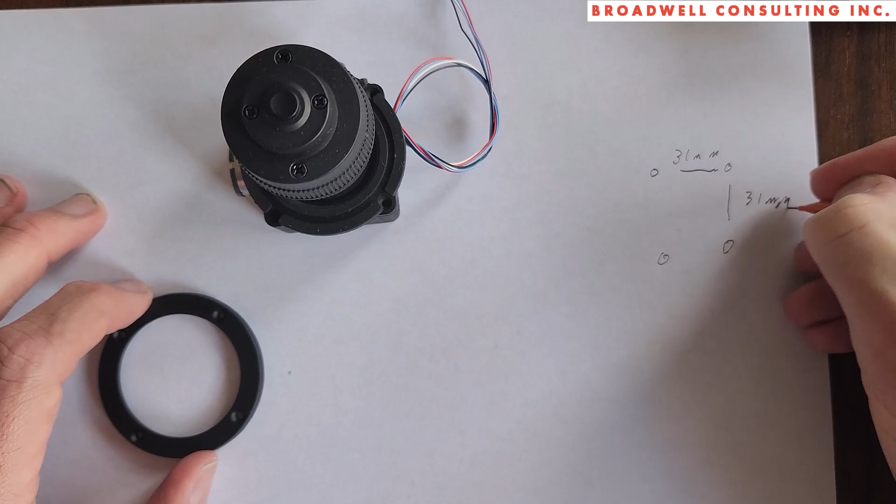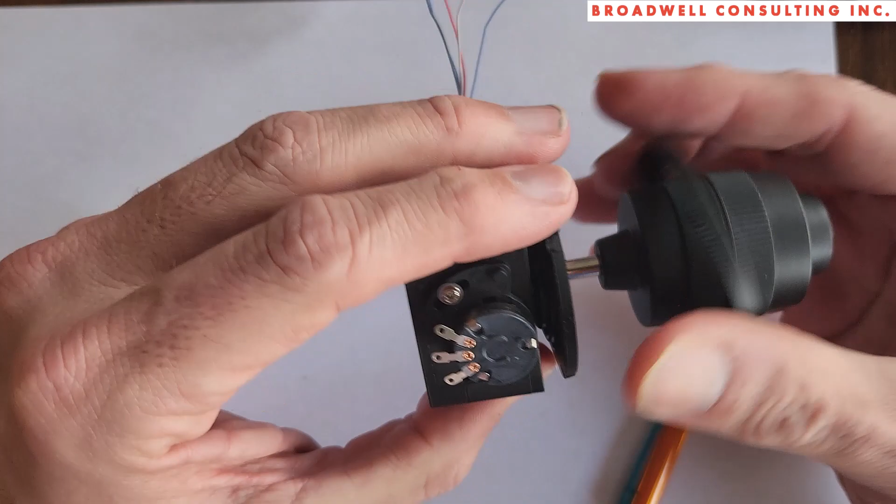And then we've got this rubber seal here that goes there, and that fits just inside of the back of this plastic thing. I think we're supposed to push this through and have this sit on top of the wood. And so we really don't need a very big hole for that joystick whatsoever.

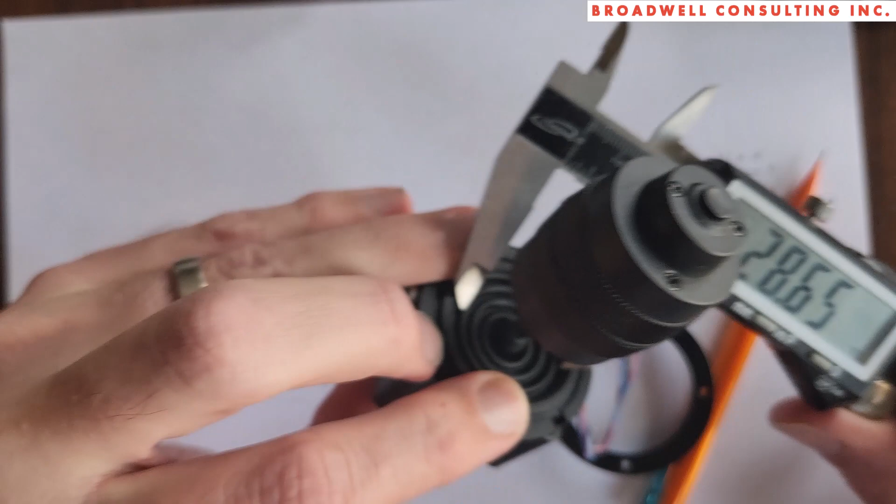If I look on the inside here, there is another circle here that allows the joystick to move. We're going to want to go over a little farther than that. So it looks like the joystick, we'll look at that kind of third circle in and just approximate that. So it looks like I want a 27 millimeter diameter hole in the middle.

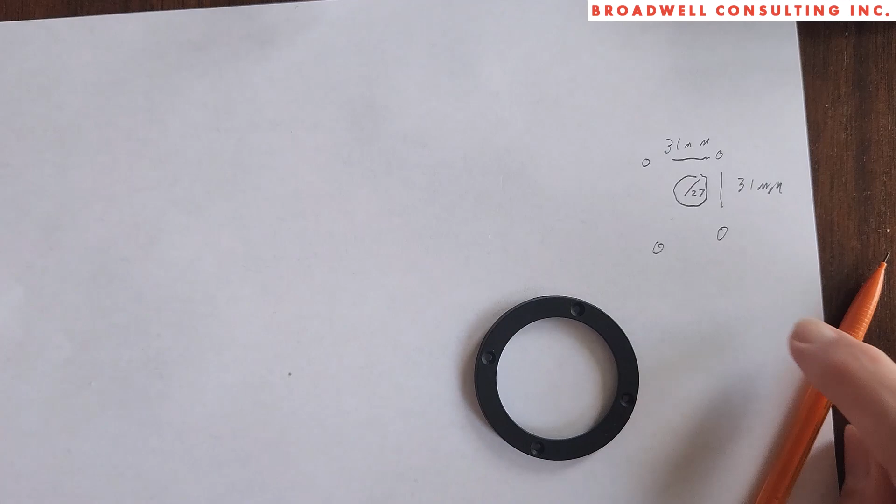Then the joystick is going to sit inside of there. And so how much height do we need? There's nothing on the bottom that looks interesting, so we can put it almost straight down to the bottom. And it looks like it's 30 millimeters high.

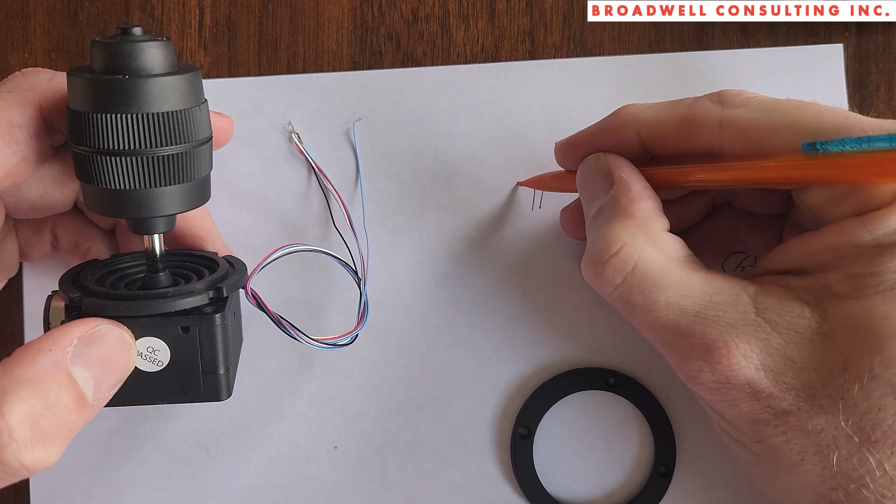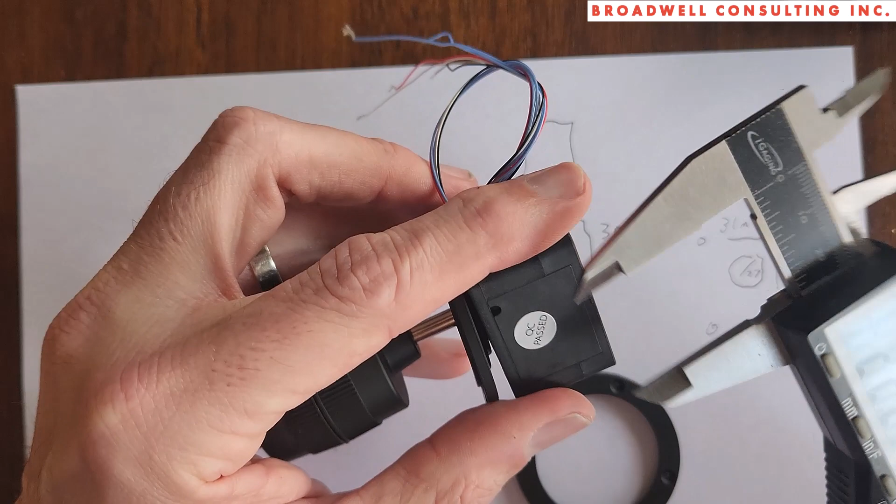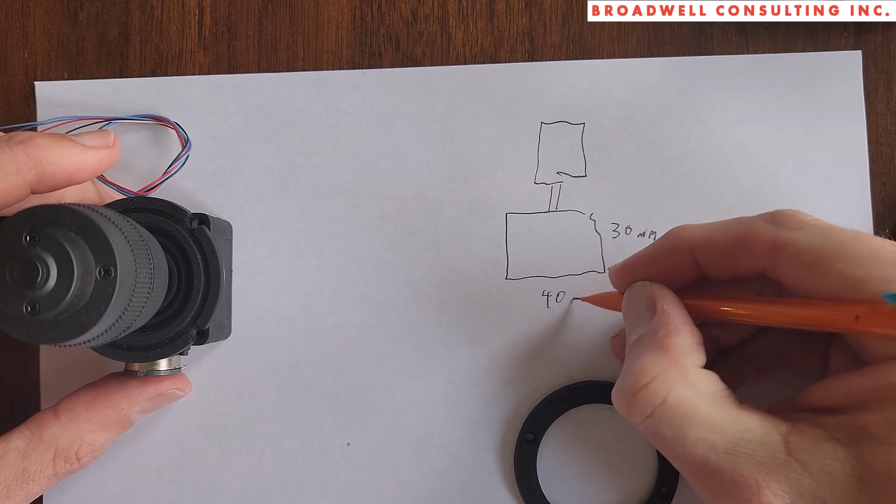And 40 millimeters square at the bottom. So I have 2 of these, so we'll want to make 2 sets of holes that are similar to that.

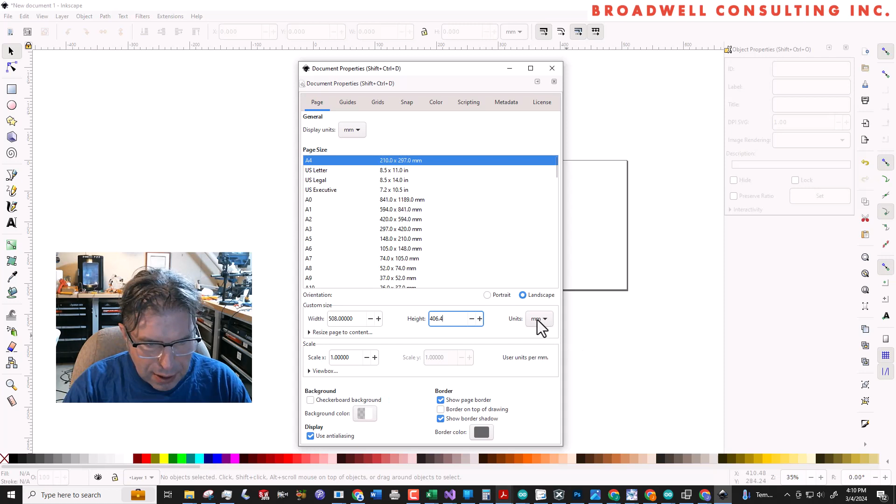So now we've got a bigger square in which we're going to do this. So let's create a circle that will be our main center hole. I'm going to hold down the control button. That gives me a perfect circle, and it doesn't really matter how big it is.

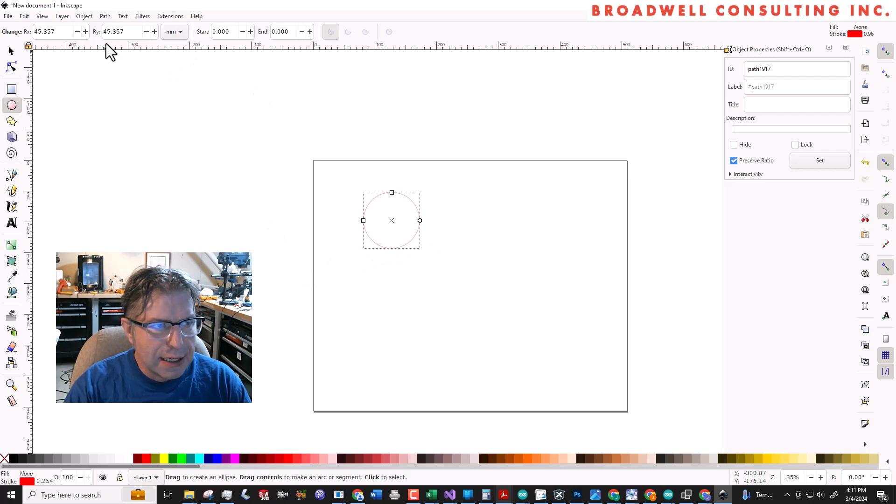Now I'm going to go over here. I'm going to unselect it and reselect it. I found I've had better results there. I'm going to make sure that this lock is set because I want the lock to keep the length and width the same. And we said we want our interior hole to be 27 millimeters.

So 27 millimeters across. And then we want 4 little holes. Again, holding down the control key. And we didn't say how far those were. I saw the screws that go through them. They're quite small. So let's set these for 2 millimeters each.

And that's the laser's just going to hit that and make a small hole. And we want 2 of those.

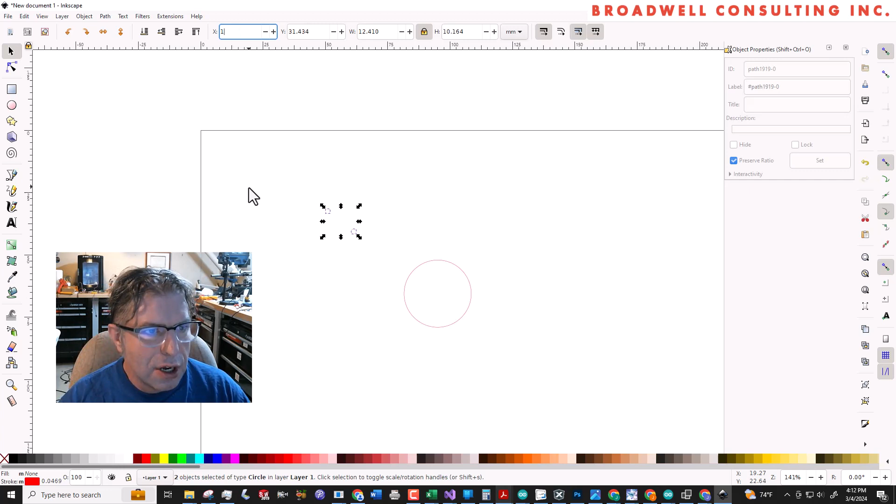I'm going to set dimensions. I know I want them 31 millimeters apart, that's how big our holes were. So I'm going to set the X to 1 on this one, and the X on this one to 32. And actually, I'll do that with the Y's as well.

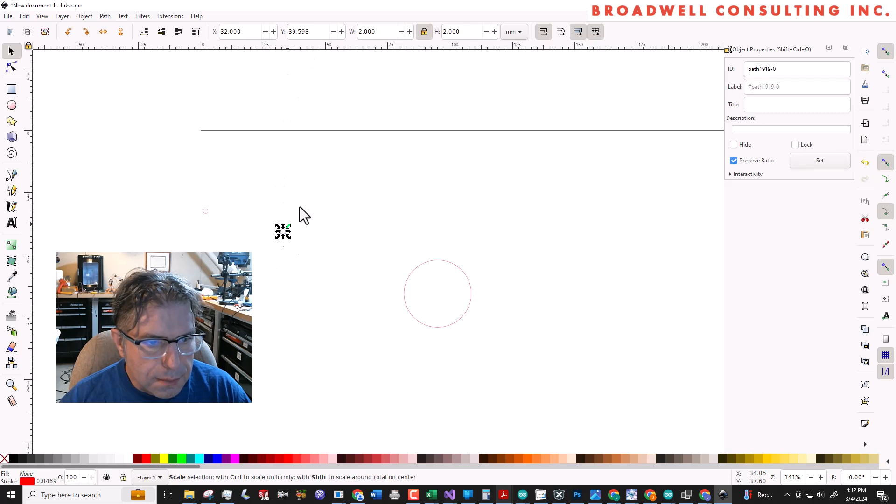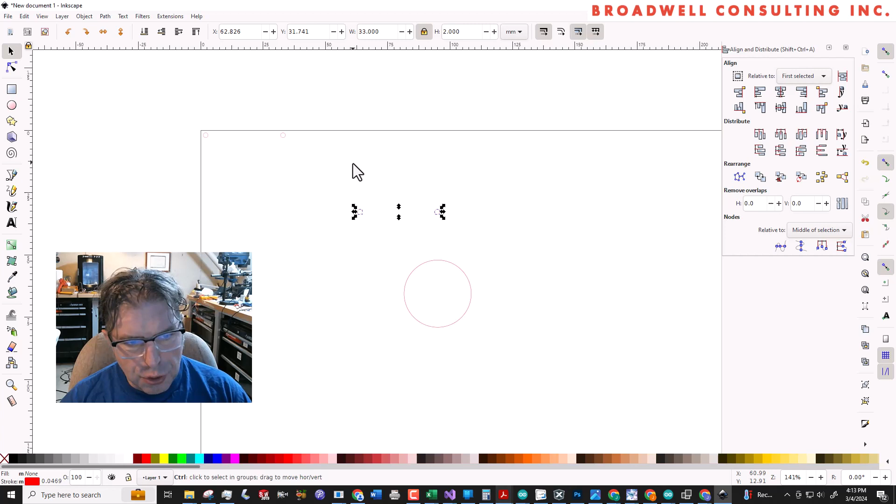Okay, so now I've got 2 circles that are 31 apart. I'm going to cut and paste those. I'm going to come up here and go to the alignment, and I'm going to hit Control G to group those 2.

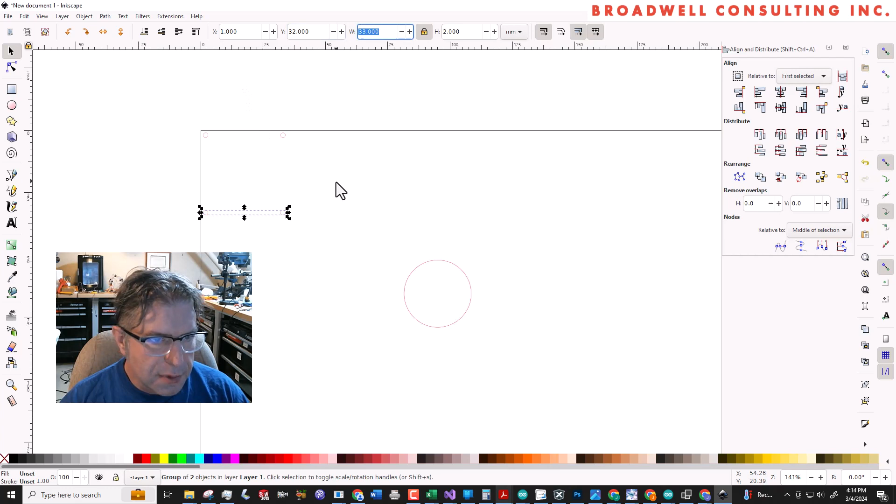And now I'm going to say align them both left. And I set this group at height at Y of 1. I want them 31 millimeters apart, so I'm going to set this one at Y of 32. And that looks good. Now I'm going to take all 4 of those and group them.

Now I want to put my circle in the center of those, so I'm going to say align center and center. And now I'm going to hit group on that. And there we go, that should be the circle that I want.

So before we go any further, let's take this and cut it out on some cardboard and make sure that we like the way it looks.

So I'm going to go to create a new design, upload a file. And I'll upload the beginning of my joystick box.

And actually, let's go back and let's put a little box around this guy so that we get another cut, because I don't want to have to deal with that whole thing when I'm just testing. So I'm going to create a box in a different color, because that's not what I wanted. To get a different color thing, hold down Shift and then do it.

So for right now, let's draw another box around this. I want no fill, and I want it to be blue, which it is. And we will make that guy 40 by 40.

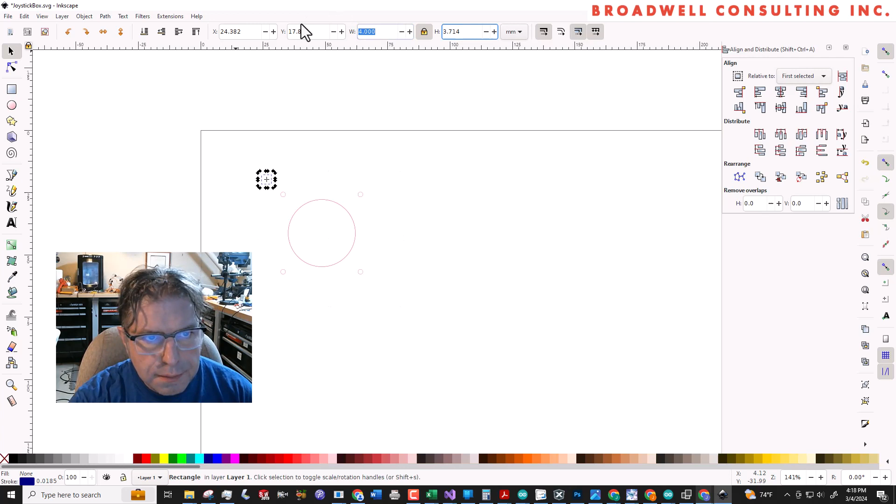And again, this is grouped already, so we'll take and we'll center it on that. And I made this blue and the others red. I wanted to cut the red ones first, then the blue. You want to work from inside to outside.

So now, let's go into the Glowforge software. And forget that, let's upload my file.

And that's good, and you can see now I'm using an unknown material. I'm going to set it to medium draft board, that's what I use for this heavy duty craft board that I'm using.

And you can see it separated it into two separate cuts. One is the outside cut that was in blue, the other is the inside cut that was in red. These are in the wrong order for me, so I'm going to drag this one up above that one. Now it will cut the inside part first and then the outside part. It runs the steps from top to bottom.

So let's, we're looking at the Glowforge. Let's put some paper in it and let's cut it. Okay, I loaded my paper. Let's drag this up to the corner so we use as little of our materials as possible, and we'll hit print. And this will be a fast one.

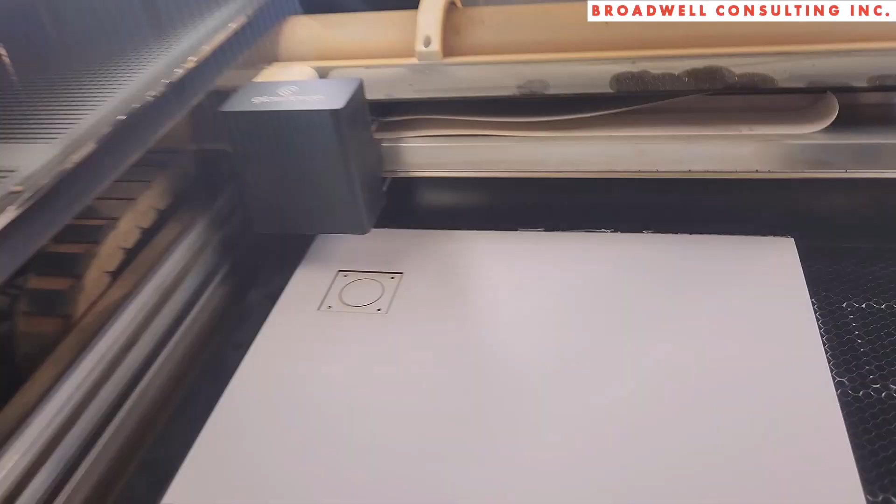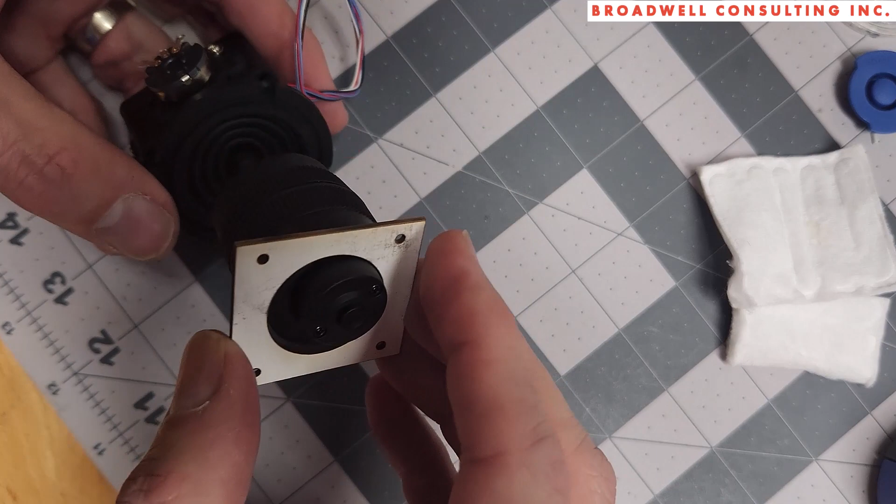All right, and let's check out the fit here. That's interesting, this doesn't go through there. That's not something I anticipated.

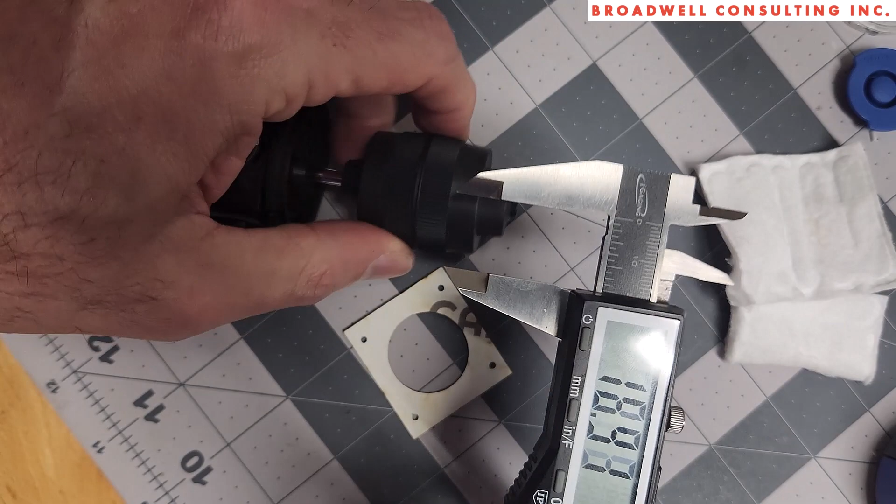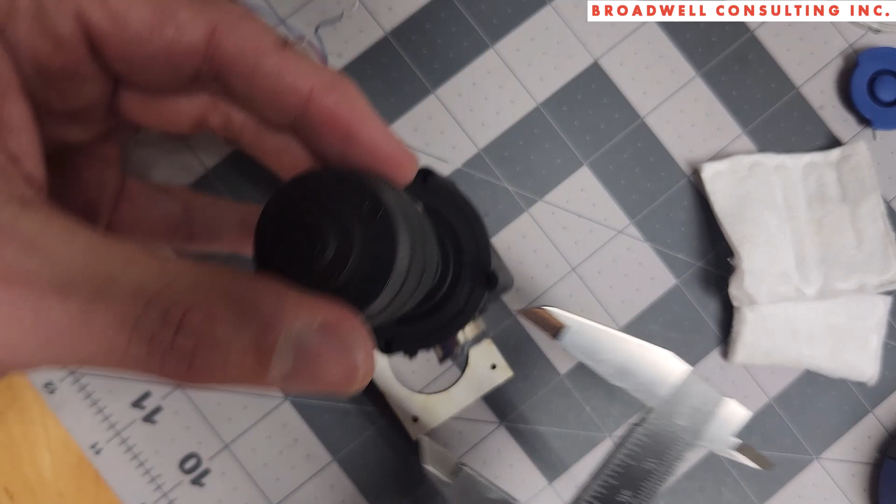So now we're going to bust out the calipers again and figure out what size hole do we need to be able to pass the joystick through there. And it looks like 36 millimeters should get the job done, and that's still a little smaller. Actually, not a coincidence, this inner ring in here, it looks to be the same size as the joystick.

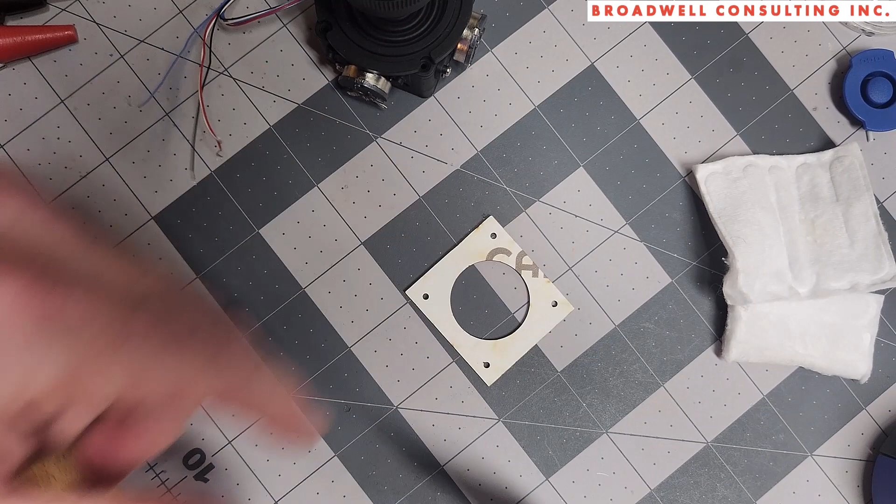So let's take this guy, let's make that hole bigger up to 36 millimeters and cut it again.

Okay, going back to Inkscape, we're going to take this guy, we're going to click on it once, that gets the group. I'm going to click on it again. And if I keep clicking, eventually I get that inside circle.

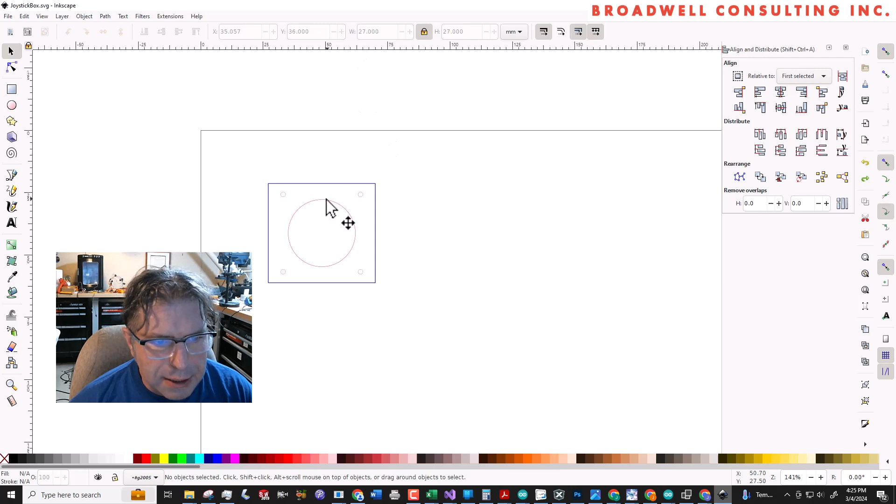And so we said we need the diameter on that one to be 36. And that screws up the whole— I'm sorry, that was not right, that was the Y. We want the width to be 36. And it measures it from the edge, so that screwed up this whole group.

So we're going to ungroup this. We're going to get rid of this guy for a minute. The 4 circles are still grouped, so I'm going to hit Control U to ungroup.

And I lost my grouping on those circles. So now I'm going to hit Control-G to regroup those. Hit this guy and do the alignment on the centers. And so now I'm going to regroup these and I will align it again within the center of that box.

And say save. Go back into Inkscape, or go back into Glowforge, delete this guy, upload the file again. And let's adjust the paper. And let's cut it.

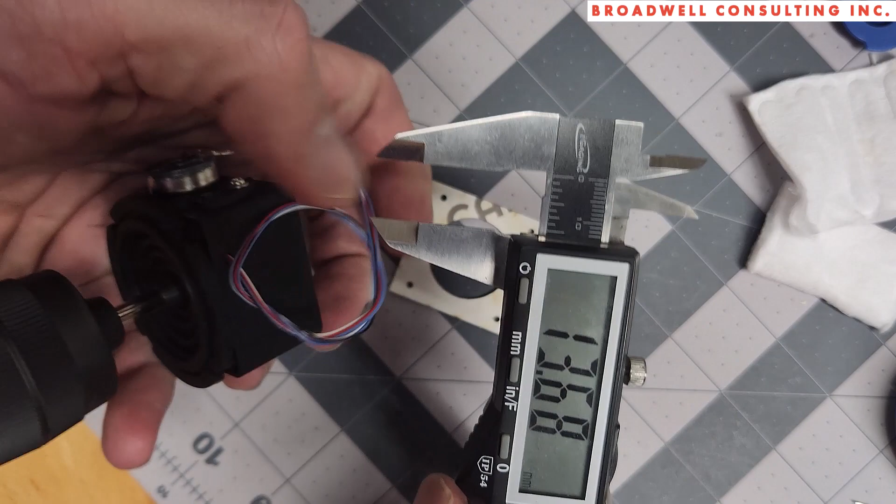I'm going to measure the diameter of that rubber seal. And it's hard because when I squeeze on it, it gets smaller. That looks like about 39.3 millimeters. So we'll make it, we know we're going to have a little bit of kerf. If you don't know what kerf is, look that up. We'll call it 39.1.

And I spoke wrong. To ungroup is Control-Shift-G. That's why I was having problems before.

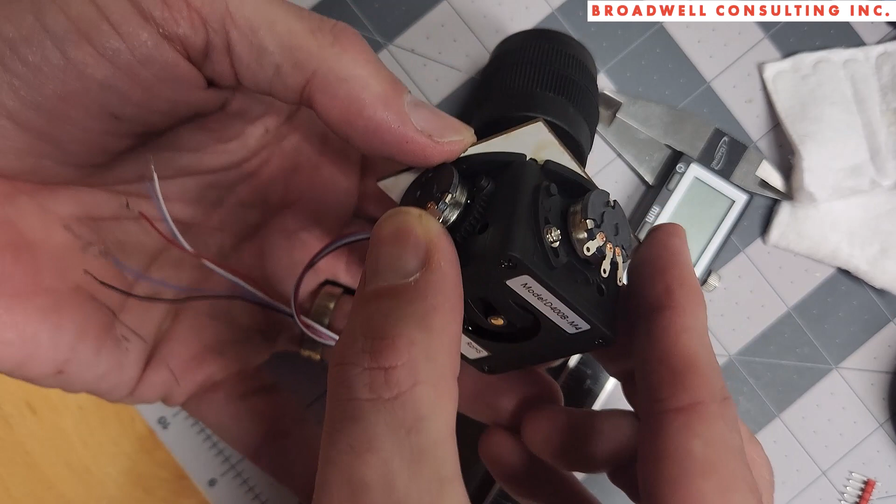looking from the bottom, that looks about right. So I'm going to get the screws real quick and put them through the holes and just verify that that's right.

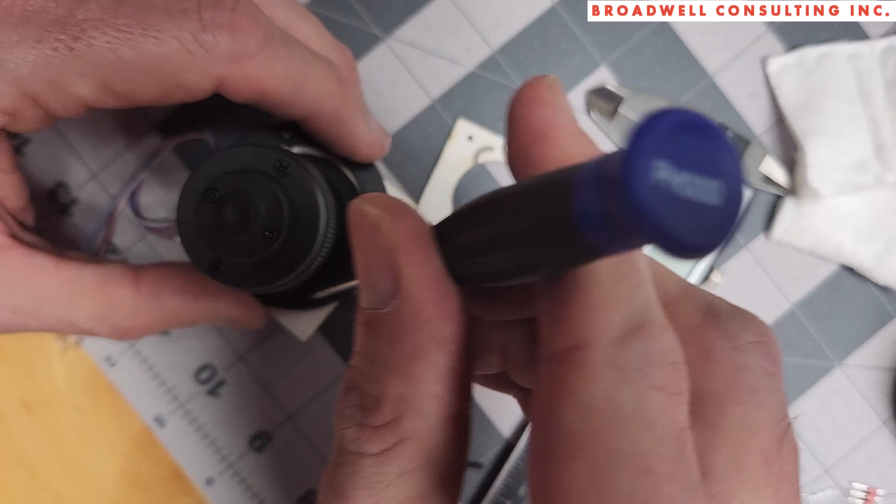Okay, and that is definitely off. These are definitely not big enough. So what I'm going to do is I'm going to set it concentric with the other one. And then I'm going to use a pencil to put a dot down in the middle of that. And that'll show us how far we're off.

So again, I'll use the micrometer here. You can see my little dot. We can see it looks like we need about 2¼ millimeters added to that.

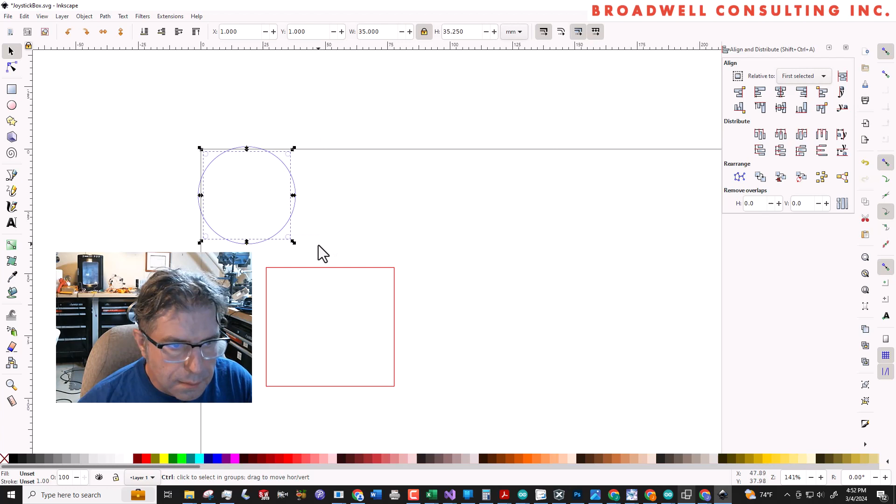Okay, so now we're going to make the box that we're going to put the thing in. And there's no reason for us to reinvent the wheel here. We want just a standard tabbed box. And there's lots of generators out there.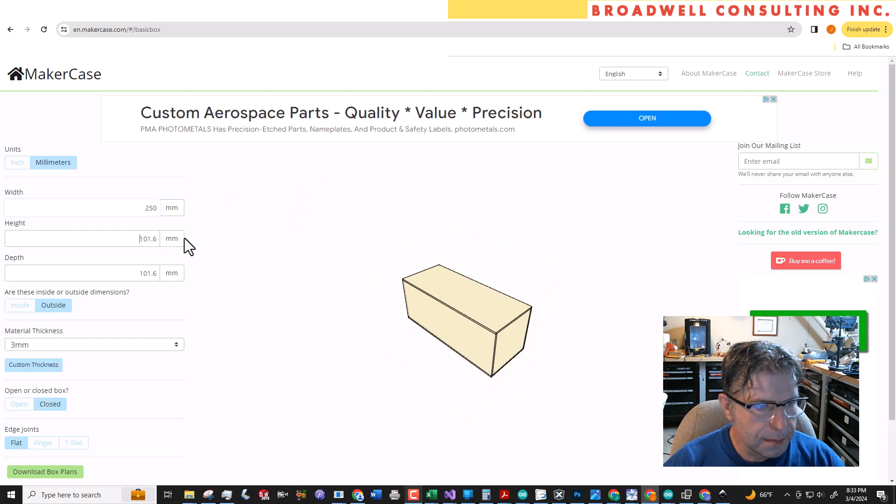250, 150, and depth is 40. So that's what our box is going to look like.

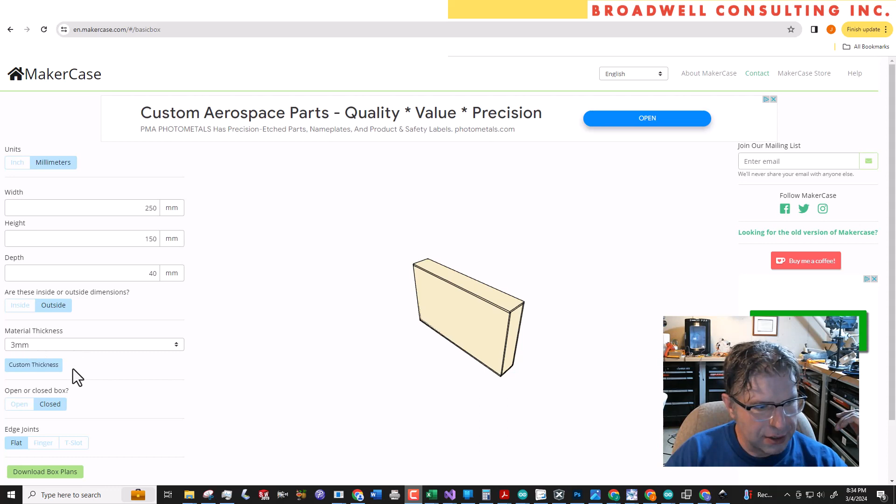We're going to be using 1/8 Baltic birch plywood, which is approximately 3 millimeters. That's good enough. We can adjust for kerf and things like that if we want to, but I'm not going to. We want this to be a closed box because we want a top and the bottom. And so that looks like a good box.

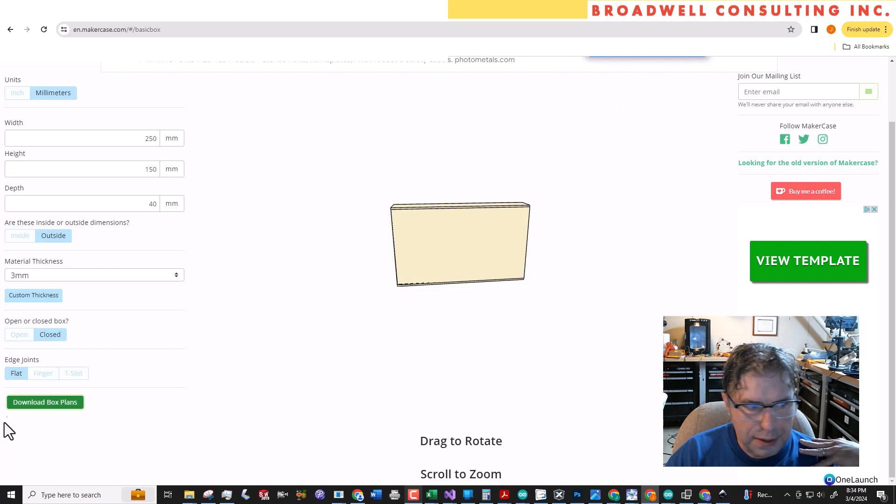And we'll import this into Inkscape and then add our holes to it. I don't like the panel labels. That's just something that I delete off. And so I'm going to do that, and I'm going to say, oh, we don't have the finger joints. Edge joints, finger. Okay, that's what we want, because I want to be able to put it together that way.

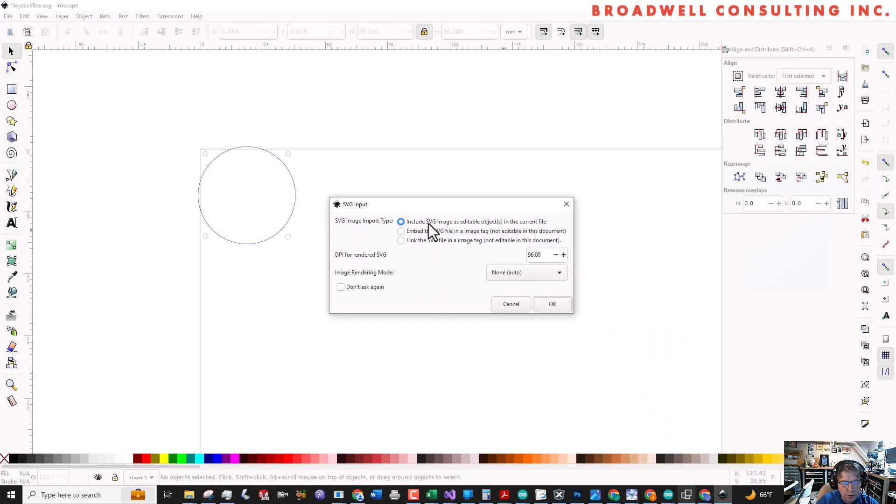Download box plans. Disabled. Download a single file SVG. And there it is. Now let's drag that file that we downloaded into Inkscape. We're just going to drop it on top of the file we've already got open. We're going to say include SVG image as editable objects in the current file.

And zoom out, and we can see we've got those here. And I'm going to take those and make the lines a little thicker so I can see them better. Doesn't really make any difference.

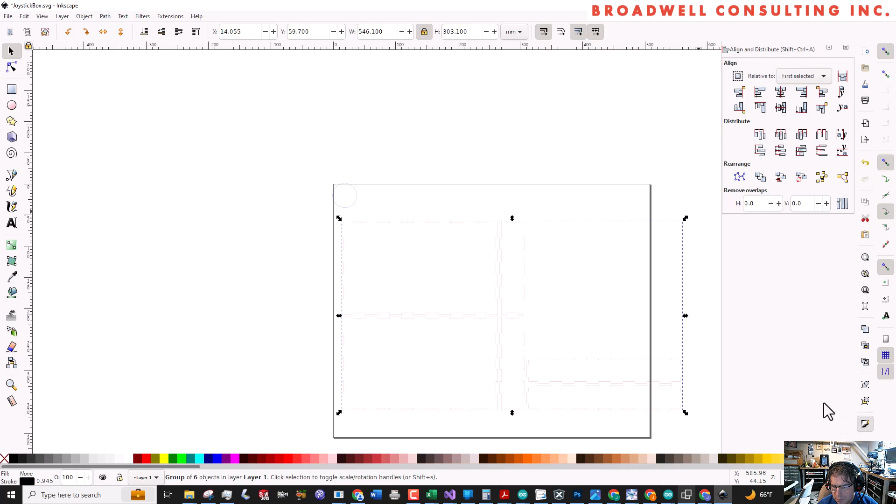That's better, and these are grouped. So I want to be able to move them around on my print bed, so I'm going to go to Object, Ungroup. Now I've got individual items, which is good.

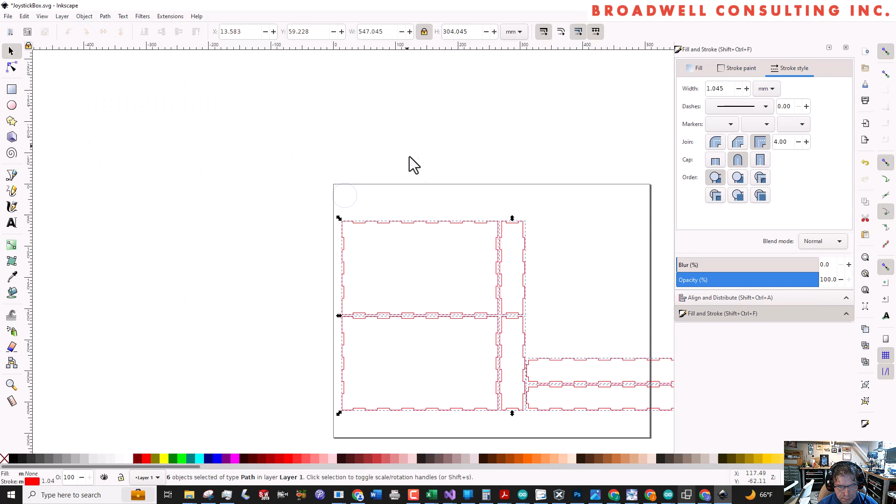So one of these is going to be my top, one of these is going to be my bottom. Let's take two of my holes and align both of those centered from a horizontal, and then let's use the distribute. Yep, can't do that.

How far apart do we want these? We know that this thing is 250 wide, so maybe we'll make it 180 separate. So again, we'll use the trick of declaring this at number 1, which would make this one 181.

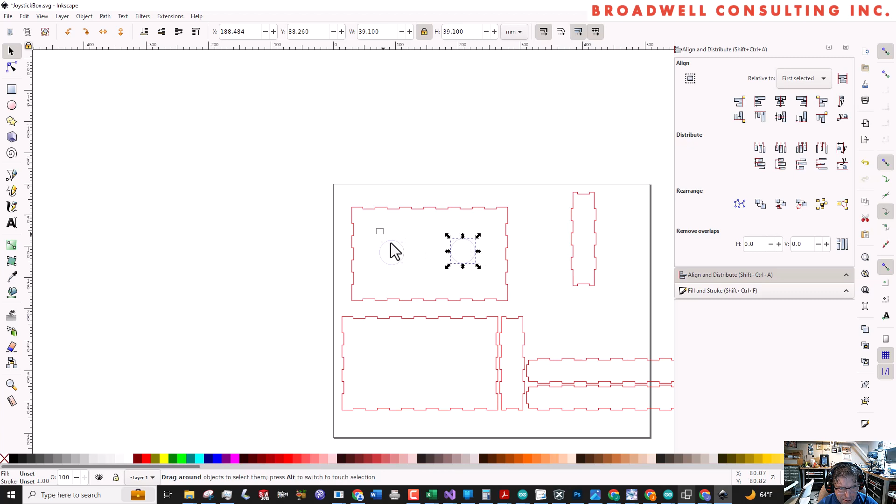And do I like that? No, I think I want them about, I'm just going to eyeball it. I think I want them about that far apart. So again, I'll do that.

And now I'm going to group them, and I will align the group now centered with that. So now I've got two sets of holes. If we get in close, we can see we still got the little holes, and those should cut that way.

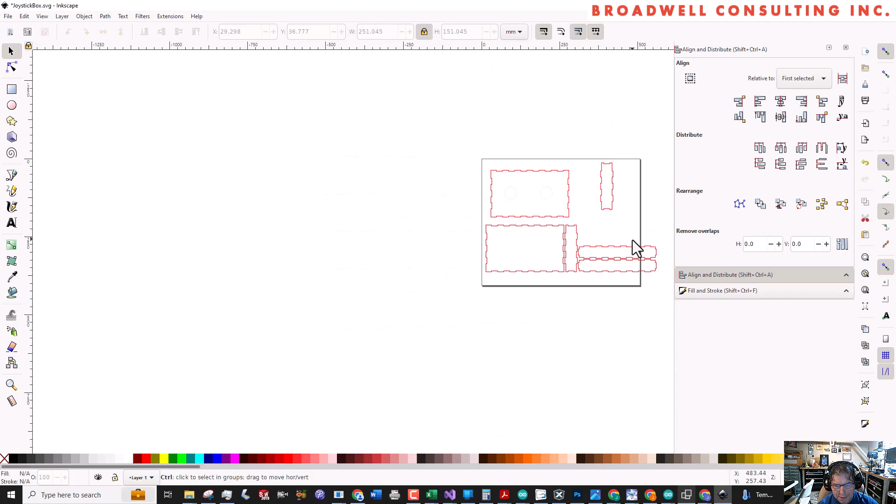Next, I know that I have these long pieces right here, and I know that I'm going to want a place for wires to come out of this thing. So I'm going to create another box, and we want it to be an inside cut.

So again, I'm going to do it in blue. That's not what I wanted. We'll do that, no fill. I'm going to hold down the Shift key and click blue. And so we've got that.

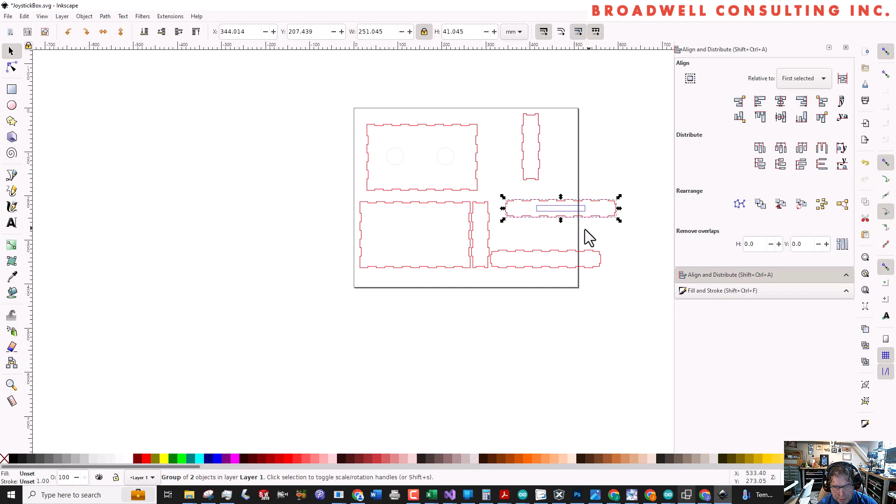And so now how big do I want it within here? Probably smaller than that - that width looks about right. So I'm going to select both of these again, and align it relative to the centers. I want these things to always move together, so I'm going to group those two.

Now, maybe we should add some text. So I'm going to come in here, and this is for a robot controller. And I'm going to take that text and make that Arial.

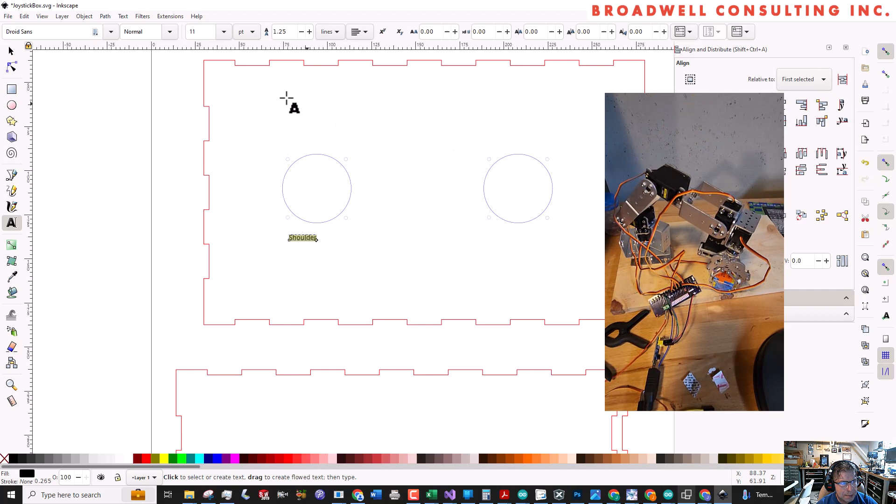Actually, Arial Black is what I like. Is Arial Black available? No, I guess it's not. Okay, and we'll make that

18. And I want to score these, so I'm going to mark them no fill, and I will make my score lines green.

And so then I'm going to duplicate this guy. If you see that I've got these arrows, this lets me make things bigger and smaller. If I click on this again, you'll notice the arrows change to these angular arrows, which let me do this instead. And I'm going to hold down the control key, and that'll make it move at, I don't know, 30-degree angles, 15-degree angles. I don't know what it was doing there, but it's definitely constrained.

So I'm going to take this, and I'm going to make it relative to that here. And it's important when we do alignment for some things - note that this is relative to first selected. So I'm going to select this box first, select shoulder, and do that.

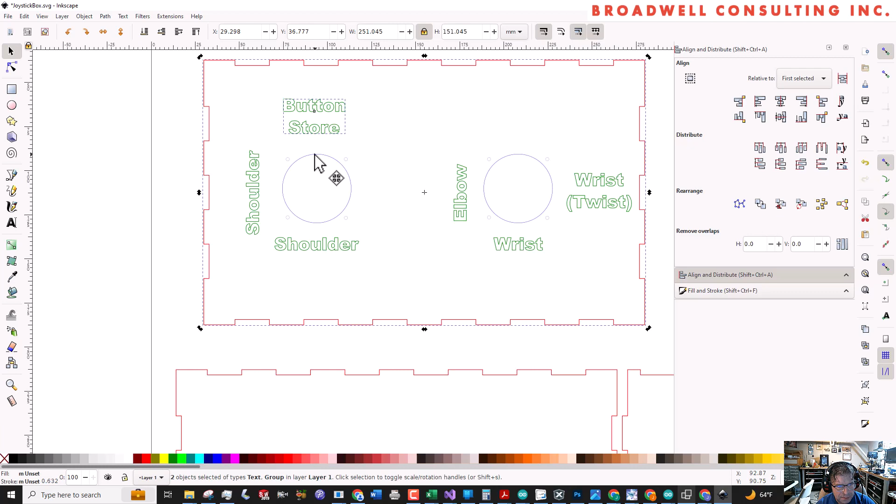Button. We'll store a position in the future action of this thing. So again, I'm going to go through here, click this, until I get to... had it, the object I want.

Make sure that that's centered. And then, for the other one, we have a gripper on that robot. And I think I want these two, make sure they're aligned with each other, and then I want them down a little lower. Okay, so these will be my...

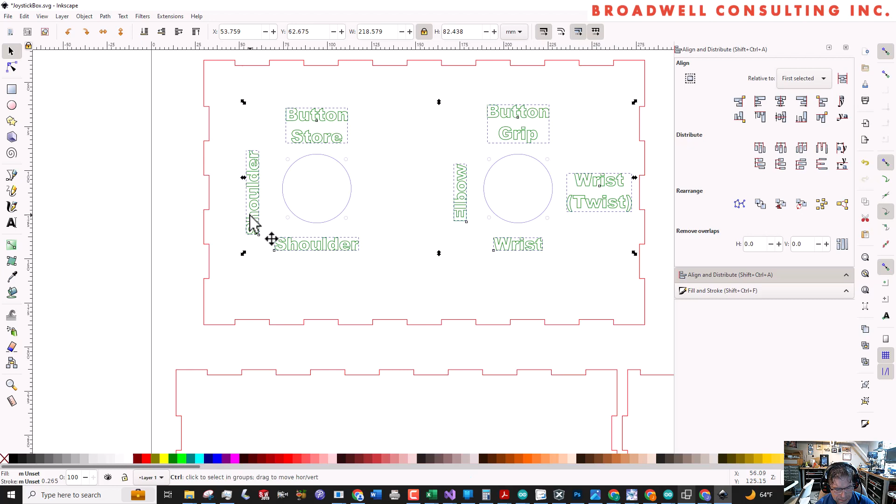in my scoring, and let's go through and mark all these and group them, and then let's add them to a group with the main thing. So now all these, since I put them all in a group, that whole thing moves around, and I can position it on the table that way.

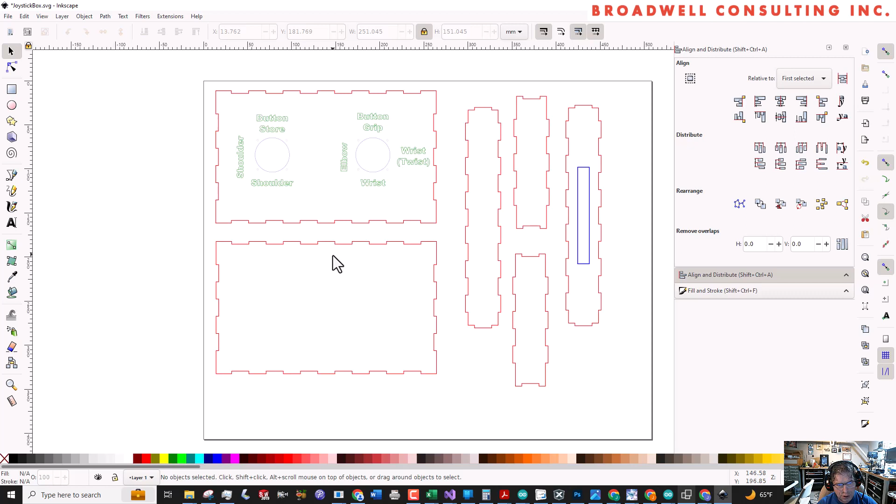Now, finally, we may want to engrave something. There's two ways that we could go about that. We could put it in the image separately into the Glowforge software, or we can drop it in this SVG. So let's do that so that we have all of our files together.

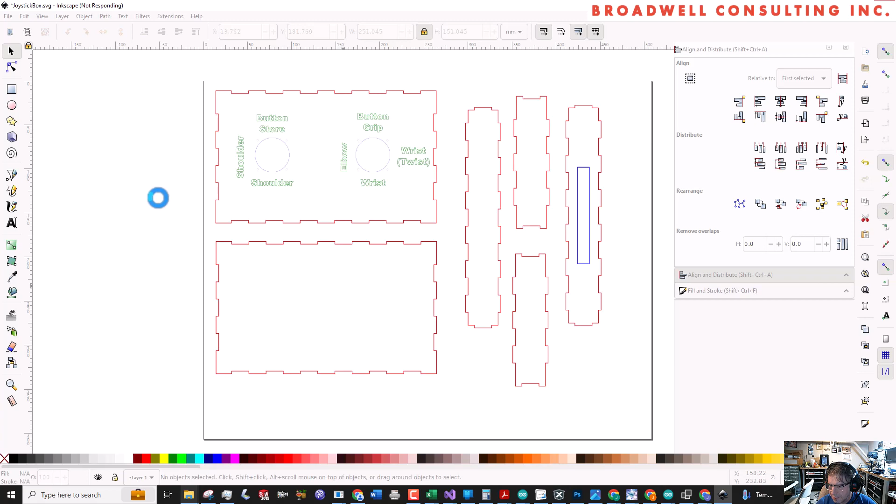So we'll drop this guy in here. Import, we'll go ahead and embed him. DPI from file, that's fine. And where did he go? It's working on it. It's a big file. And wow, that's really big.

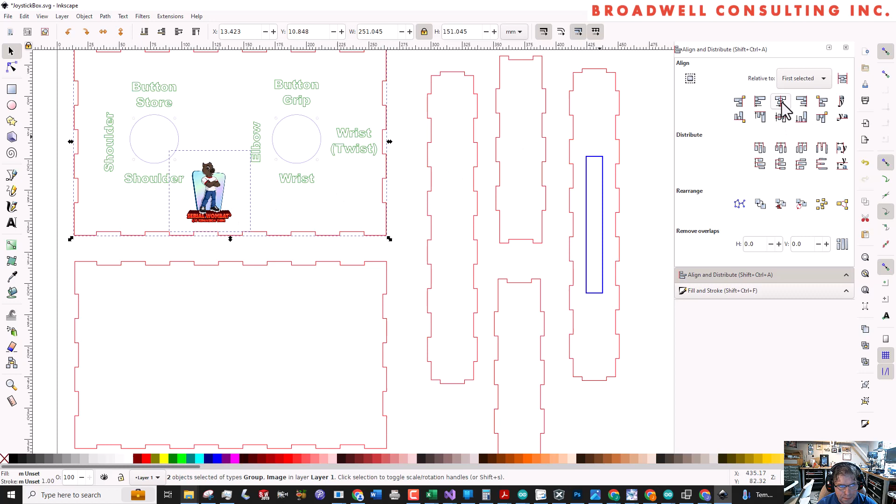Okay, so we're going to zoom out a little bit, and we'll take him, make him smaller, zoom in, make him smaller again, and drop him right here. And I will center him relative to the bottom. Okay, so again, I'm going to go back and regroup this whole thing. Then I'm going to file save this, and let's import it again to the Glowforge.

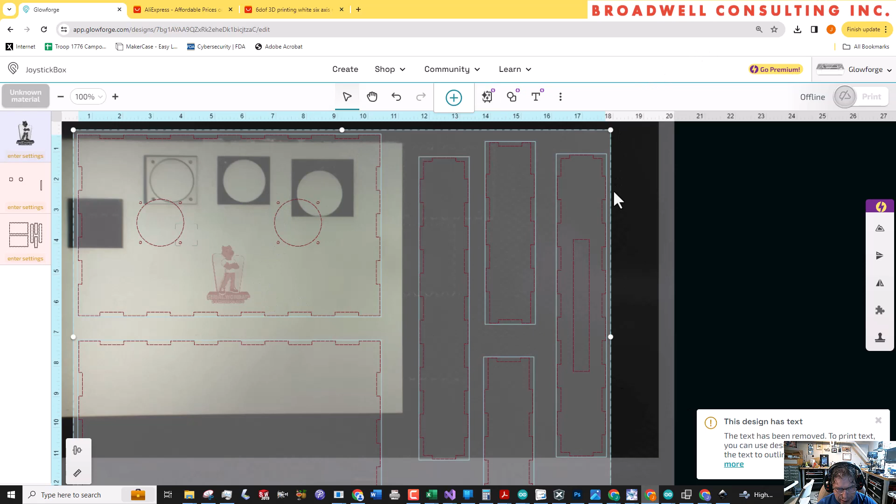The text has been removed. To print text, you can use design software to expand the text to outlines before saving. All right, so let's go back and do that. That's an important skill, and it's one I forgot. So we're going to go into Inkscape.

And again, we'll ungroup this thing. We're always grouping and ungrouping, aren't we? Okay, so we're going to select each of these guys. And once we do this, this is a one-way trip. We can't edit the text after we do this.

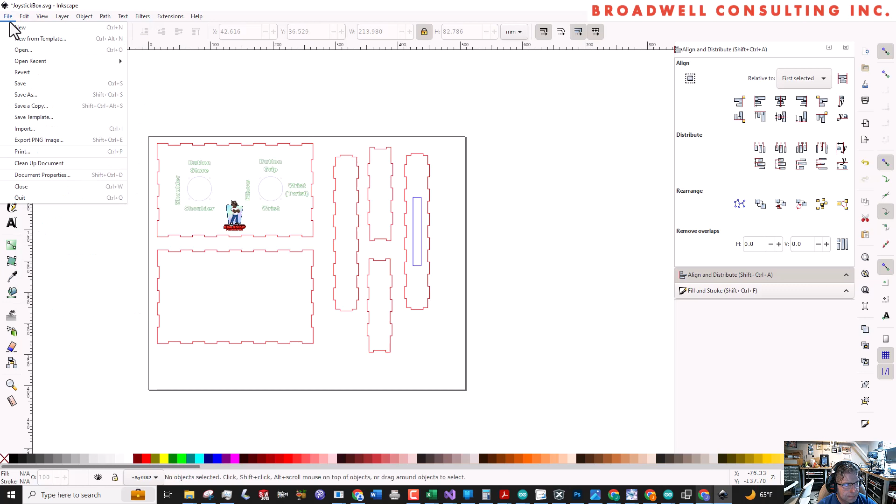We go to text and actually path, object path. Now at this point, these become not text anymore, but they become something that the Glowforge software just sees as lines. All right, that looks good.

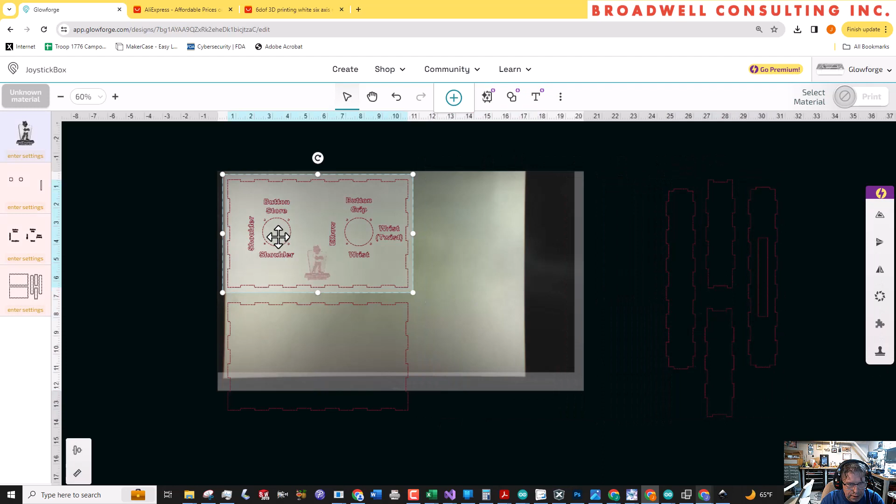Let's fire up the forge and put a big piece of cardboard in there and see if we can make one of these. All right, clearly I'm not going to be able to get all these on one page. So let's start by taking these off. I'll take this one, rotate it. Can I get that on a page?

And of course, this uses shift instead of control. That looks good. Let's put this guy over here. And I can at least get one of these guys. We'll put the most complicated one.

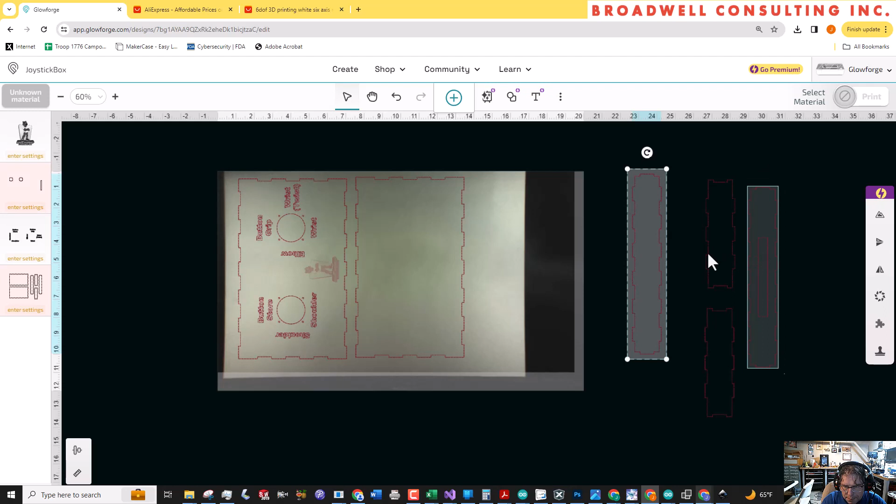Okay, so same thing over here. We see this, what do we got here? It doesn't know it because it's not proof grade. So I'm going to tell it that it is Medium Draftboard. The engrave here, I'm going to tell it to treat that like a draft graphic. I don't want to spend a bunch of time, so I'm going to let it just do it quick and dirty. And I'm going to tell it to vary power.

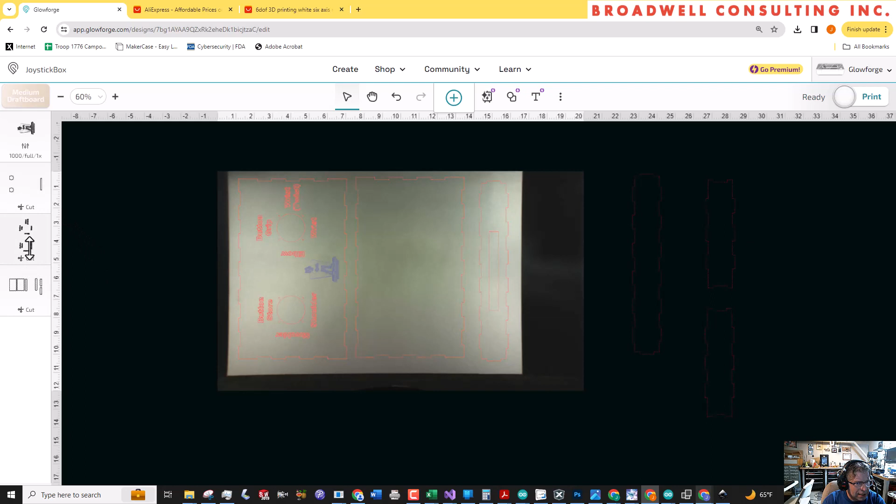And we'll just see how that turns out, it may be crappy. Then next up, these things are marked as cut. We don't want that. We want those to happen next, and we're going to tell it to score those. And there's not too much of it, it won't take long, so let's tell it to do that at high quality.

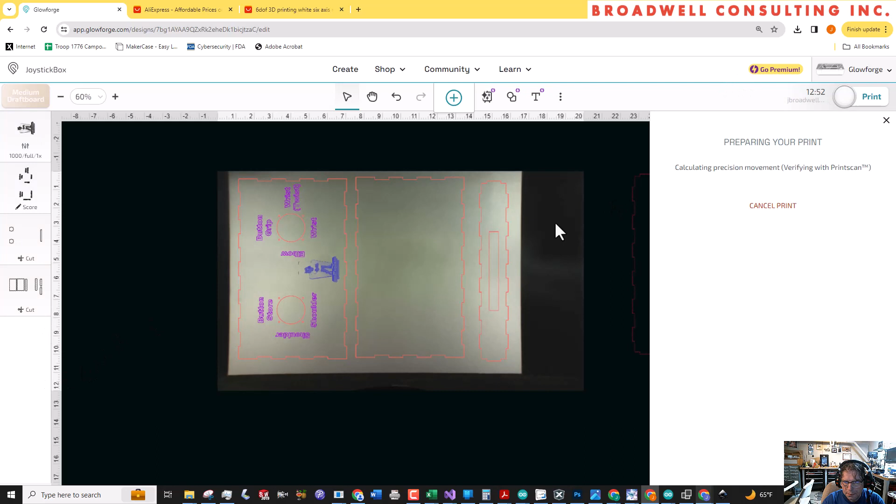And then these are our inners, that looks good. These are our outers, that looks good. And so it looks like we're ready to go. So let's say print. All right, 12 minutes. It's going to take a little while because of that engrave, that's where most of our time is going to go. So let's do it.

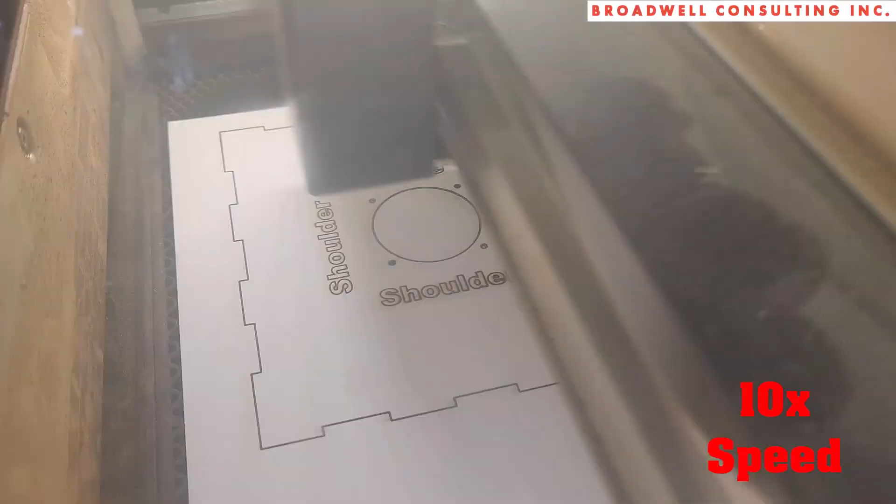Okay, now let's do the rest of the pieces we didn't get before. We'll see if we can fit them all on that scrap piece that I used previously.

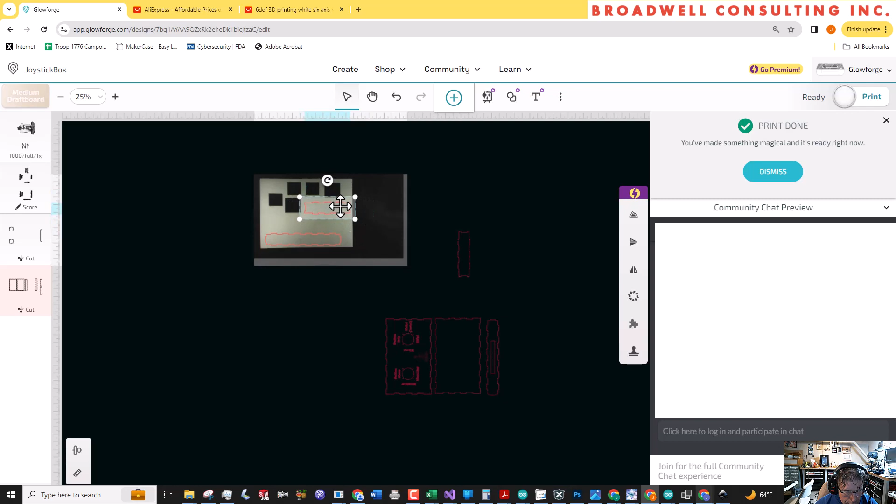All right, I love it when a plan comes together. And those are just going to all fall into the same cut range. So let's print that boy.

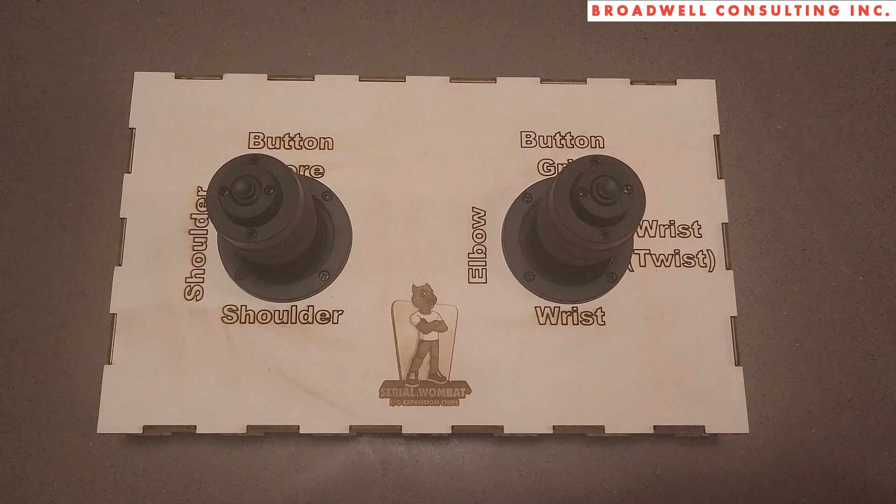Okay, here we have the finished article. Pretty pleased with the way that turned out. This was just a prototype, I'll build the final thing out of Baltic birch 1/8 inch wood. But pretty pleased in how that turned out. I hope you learned something interesting about Inkscape and how to interface it to the Glowforge interface.